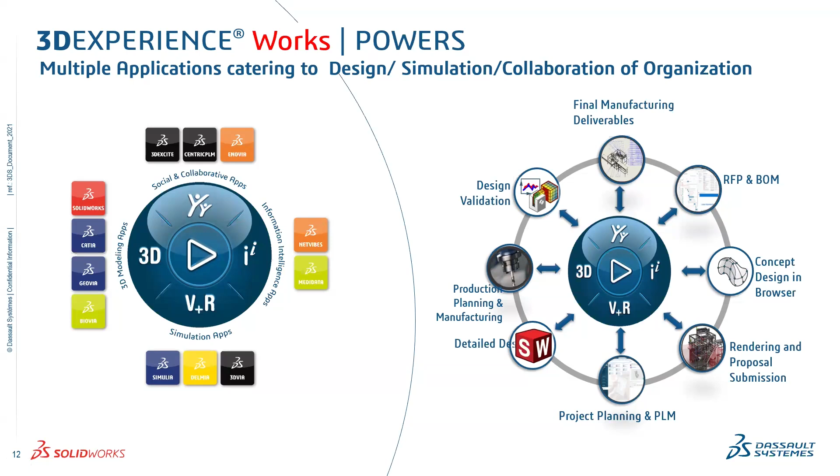We have SolidWorks, and then production planning and manufacturing, and all your design data should be validated. So for that we need design validation, basically simulation, and then final manufacturing. For all these, we have a single platform wherein all these solutions are unified.

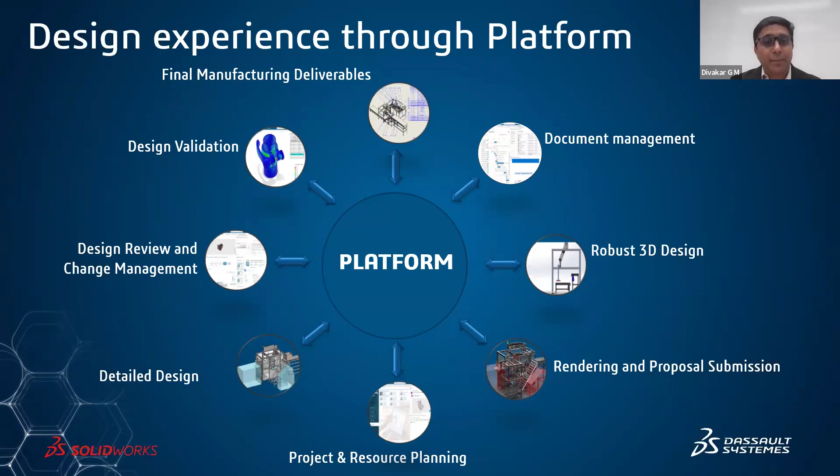And will it not be a great thing if we can provide a platform approach? Imagine a smartphone - we have applications, we have different widgets. Based on the need, we open the widgets and start working towards it. In a similar fashion, since technology has improved, can we have a platform even for this design organization?

Yes, that's what we are going to showcase today, which is nothing but our 3D experience platform. What we are going to take you through in the next 25-30 minutes, what I'm going to showcase in my demonstration is this: when you look at 3D experience SolidWorks, the latest SolidWorks, you can imagine the design and engineering portion is definitely taken care of.

You already know SolidWorks is well known for its 3D robust CAD modeling system. Along with that, the governance or data management portion is kind of inbuilt in nature. Then anything on simulation, that is also there in the same platform. So basically what we are talking about today is these are all connected products in a unified platform, which will definitely result in a collaborative work environment.

How is this possible? Because when we say latest SolidWorks, which is 3D Experience SolidWorks, of course the robust design tool SolidWorks is there. On top of it, when you procure any SolidWorks or upgrade your existing SolidWorks to the latest SolidWorks, you can imagine the data and task management is inbuilt in nature.

You heard it right - you are not going to procure one more software to manage your data. Instead, within SolidWorks itself, you will be able to manage your data, whether it's revision management, version management, or task management. It is already there, inbuilt within the SolidWorks interface. In the next couple of minutes, you will see a demonstration on that as well.

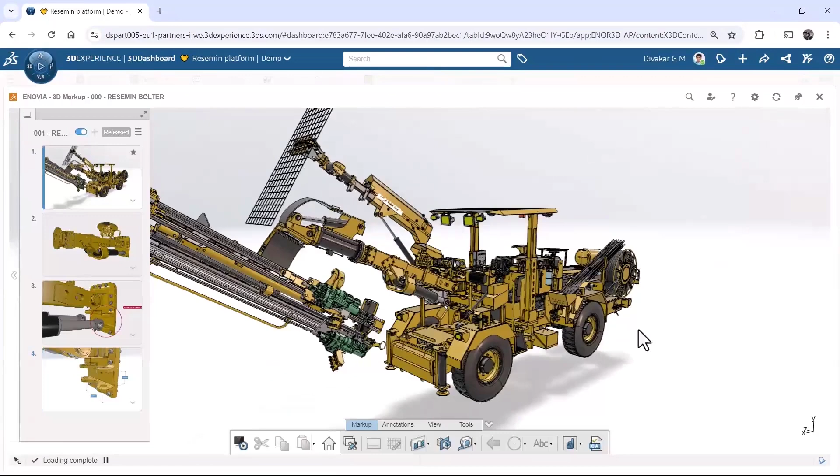Now, the design head opens the task and he sees that instead of going by emails or text, he can literally go by these kinds of markups, which were created by even a sales leader or a marketing team or the service guy as well. So he understands, yes, this is the machine I'm supposed to work on. In this subassembly, there is a requirement that I need to add - in this case, I'm planning to do a design of a knuckle head assembly. So this was pictorially communicated to the design head as well.

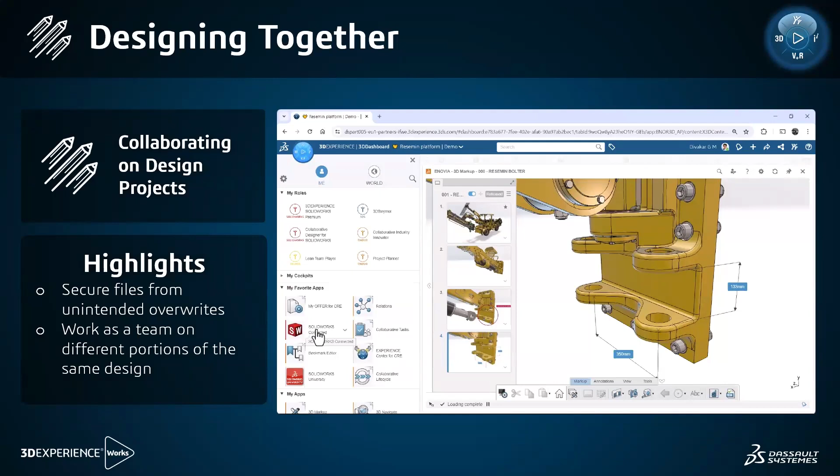Now, coming to the design head, let's see how he can start his journey. First, he will just log in. He will launch SolidWorks from the platform. He will understand this is the assembly - he knows the details - so he will open up the assembly. Yes, this is where the assembly needs to be done.

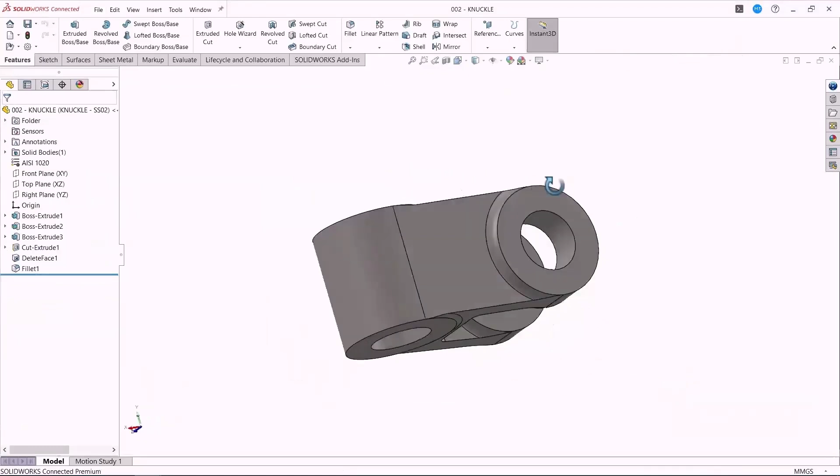He will understand the first thing to work on is creating a part. For example, this is the knuckle part. I'm not getting into how this can be created - he has already created the part.

Now you will see the changes, how SolidWorks will help you. Data management is already coming into picture. As you can see on the right pane, a click of a button and I'm entering the platform area as well, that too within the SolidWorks interface itself. So when I save this component, you see earlier it was empty - now you have all the relevant areas like revision, maturity state, all that information automatically generated.

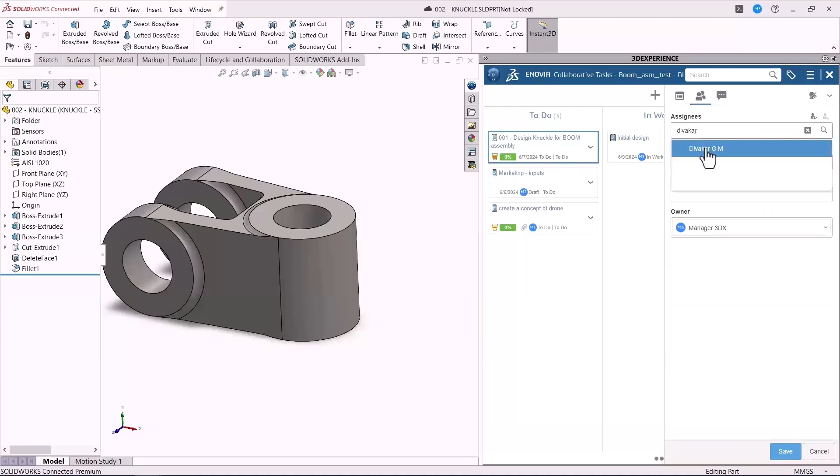Now, as a next step, I have created this component. I wanted to push this to my design engineer, stating that he should build a complete assembly out of this knuckle head, which will be fitted into that particular boom assembly. Now, instead of telling my engineer to go to this folder and pick up these components, in the task itself I've started creating a task. I have added the links to those components as well. Then finally, I'll assign this to my engineer, stating this is the component you're supposed to work on, this is the assembly you're supposed to work on, and so on.

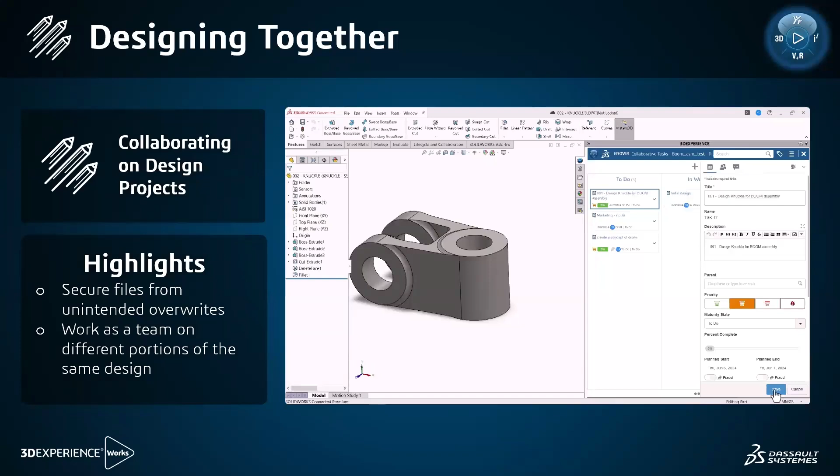So what you have seen is the transition from traditional to the latest way of working, where instead of simple email communication with words, you are seeing everything pictorially, and that too with the right data. So that's how you see the communication or collaboration has started happening.

Now let's come back to robust design - how this can be done. Many of you may have already seen one way or another how SolidWorks works. Let me show the latest SolidWorks, how it will help you be much more productive, along with the built-in data management which I talked about.

Now, as you can understand, this is the SolidWorks interface - no change at all, right? So now with a click of a button, the platform comes into picture. The designer has opened his task. He understands these are the tasks his manager has assigned. He has picked up the priority task. The manager has told him to use this data, and so on.

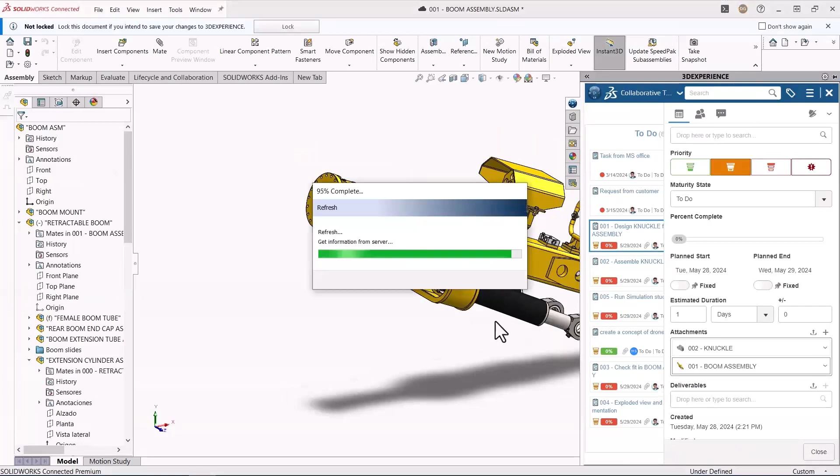Whatever the manager has assigned, he sees that and simply drags and drops it. Literally, he just has to drag and drop, with no need of searching the data. From the task, he has dragged and dropped the assembly, and the assembly opens up in the SolidWorks interface itself.

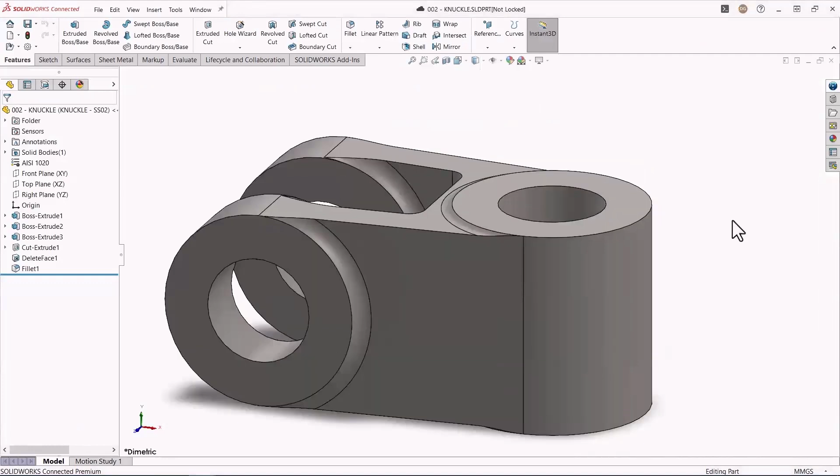He understands, yes, this is where I'm supposed to build the knuckle assembly. The design head has also attached the knuckle component, so he'll open that as well and start the journey using SolidWorks. Since he has already started working towards it, he'll move the task to 'in-work' so his manager is also informed that the engineer has started working on it.

Now, a couple of basics of SolidWorks. You can start directly from a part, creating the assembly and so on. I'll try to showcase the differences and what benefit you can get.

Now the designer understands there is a bearing he's supposed to assemble. Instead of creating a bearing, he remembers that in his previous project there was a link kit where he used a bearing that fits exactly into this assembly as well. So even without knowing the part number, he will simply search for that assembly. He will see the parent-child relationship, understand this is the bearing he's supposed to assemble, and simply drag and drop it, assembling it seamlessly.

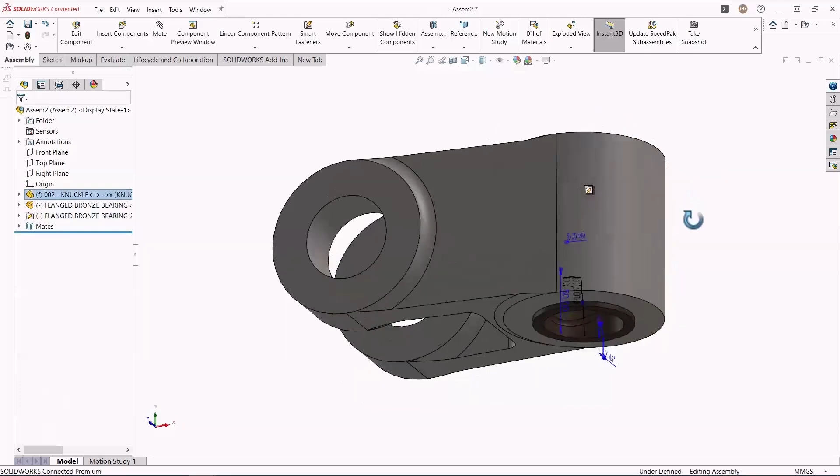Now, SolidWorks also helps you with smart components. That means any component you have assembled, any cutouts that need to be created for managing these things, can all be taken care of. Now the cutout has already been created into the knuckle component as well.

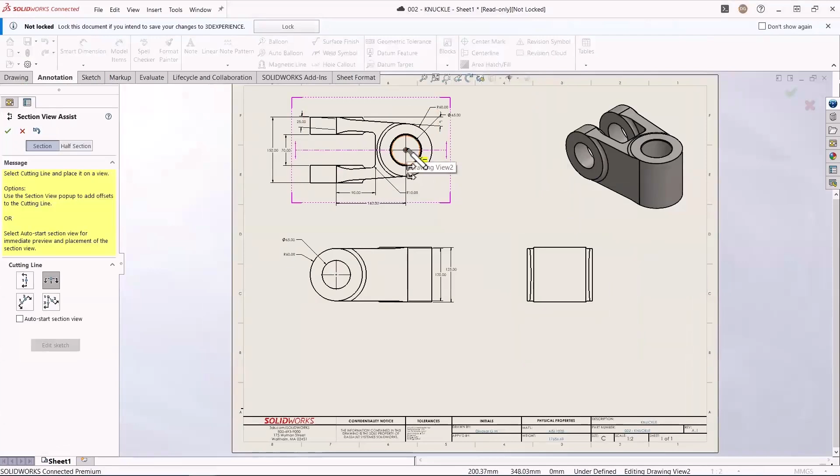Now the next thought is, since we have created the drawing, we need to pull that cutout information into the drawing. So we will update it with the sectional view. We pull it directly and see that the cutout information from the bearing has already been transferred to the component. We are talking about parametric drawing, so all the information is there.

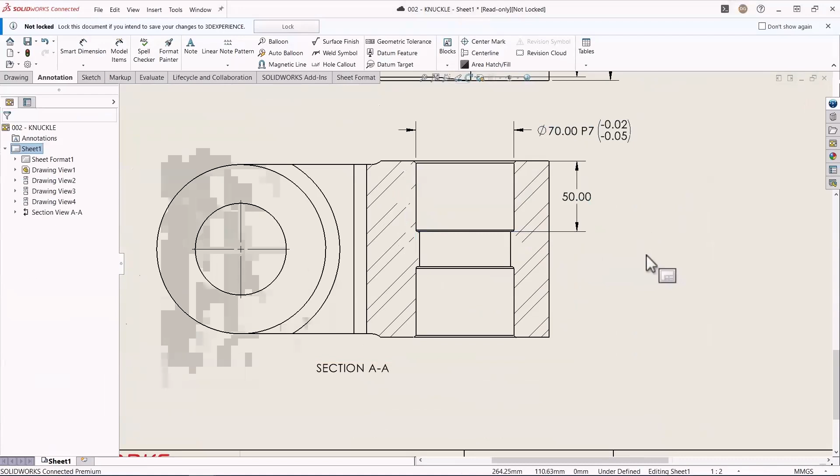Then, instead of creating the dimensions again, we take the help of the dimensions already utilized during the CAD model. From the CAD model, you are pulling the dimension data, and seamlessly you can auto-align the dimensions as well. In this way, you will be able to complete the drawing.

Now let's move to the next part of the journey, where I would like to assign a few more components. Let's talk about the design library. In SolidWorks, you have the design library, where you can build your own custom library as well.

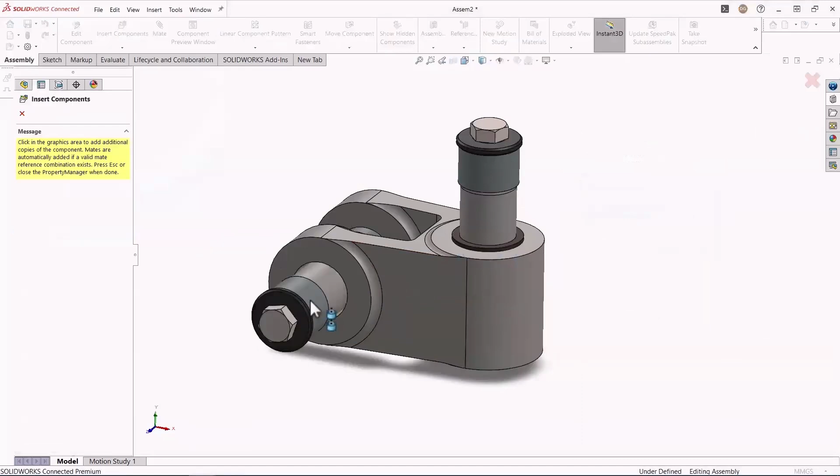For example, this expander pin, I've brought it, just dragged and dropped into the assembly, and I was able to assemble it. Not only that, with the latest SolidWorks there are many more assembly features that will help you assemble, like the width mate example I'm showcasing here. Just pick randomly 4 faces, and it will automatically align itself to the middle as well.

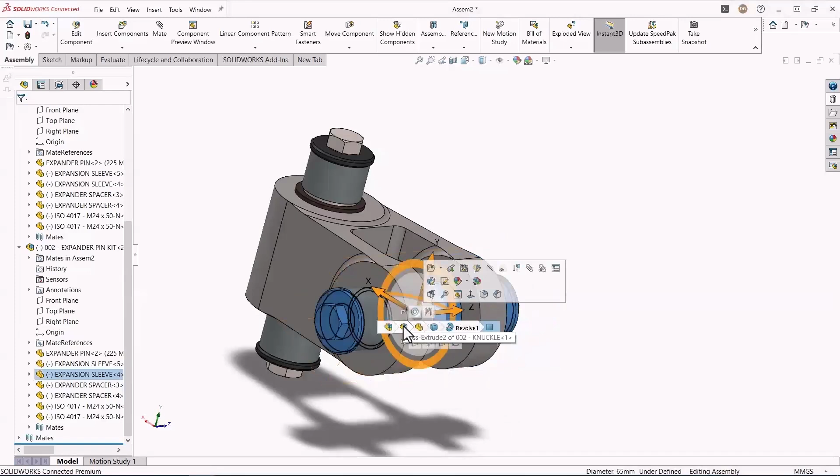Then another great feature is configurations. If you are using them, you can go to the configurations - instead of 225 length, I want 150 - and I was able to do that seamlessly as well.

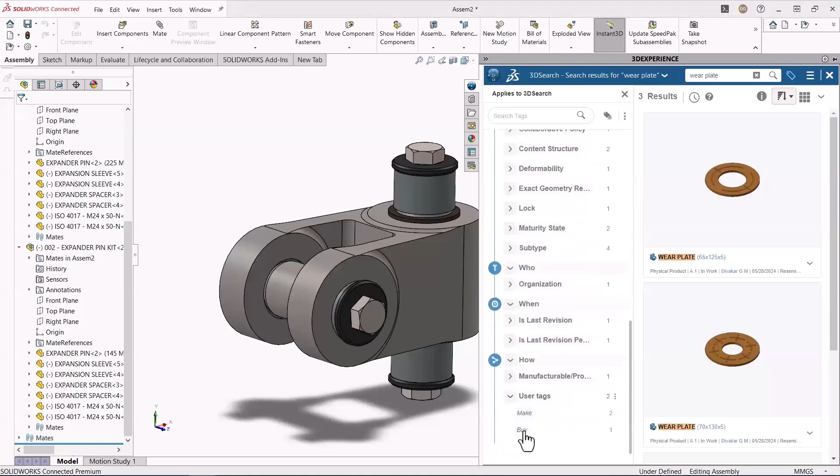Now, another great thing you can see here: I remember I'm supposed to use a wear plate in this assembly. When I search for it, I don't know the part number, but I'll search by name. I can also filter, just like Amazon or any other platform - you can search by filters too. So now I'm filtering the wear plate, where the initial results were 3. I wanted to narrow it down to the wear plate which is a bought-out component, so I pick that property and I'm able to do that. Then I simply drag and drop and assemble it again.

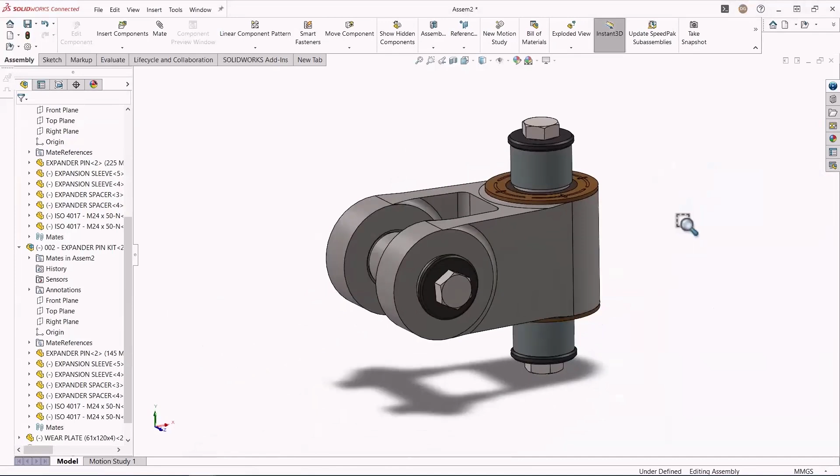So what you saw in the previous section was seamlessly utilizing all the benefits of SolidWorks. Along with that, we were able to utilize the components, search seamlessly, and do many more things.

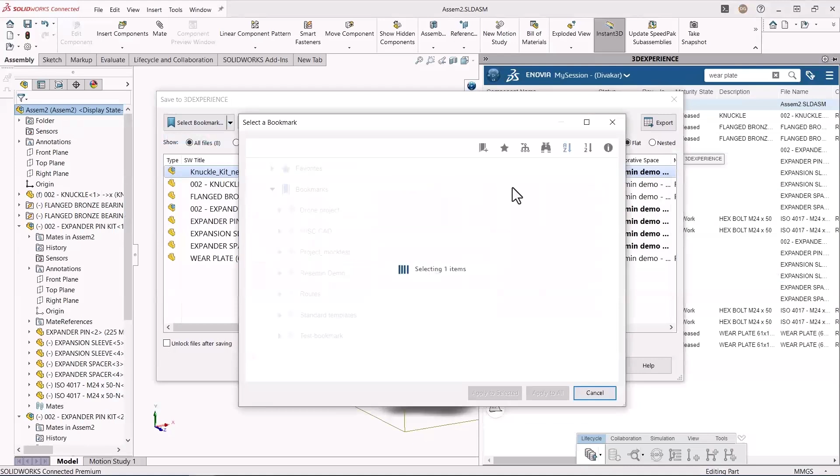Now let's understand this is the new assembly, so I need to check this in as well. As soon as I save it to the platform, I can give it a number - let's say in this case, I'll give the naming as 'Knuckle Kit', the new assembly. Now I'm going to save it to one particular bookmark. As soon as I save it, this is visible for my manager as well - he doesn't have to follow up.

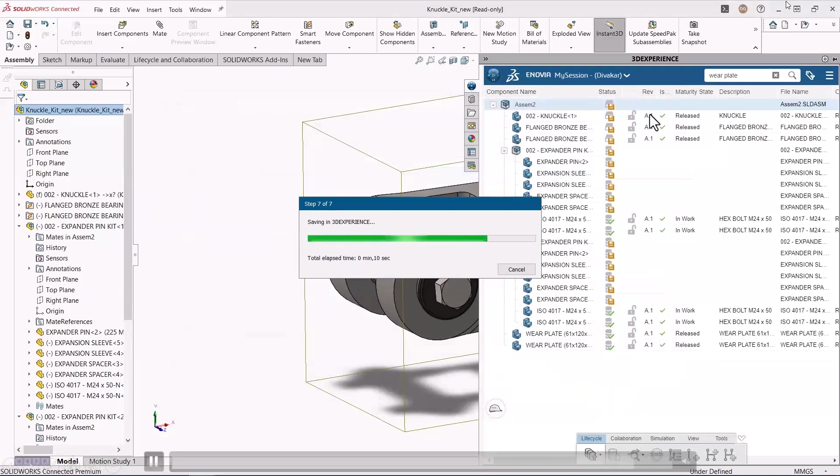He will also come to know that this component has already been done, so the data is already shared with my manager as well. Let me save this. Now, as soon as I save it, you'll see the revision and maturity information coming up automatically.

This is my last section on the CAD model where I'll try to showcase what else you can expect when it comes to SolidWorks benefit. Very quickly, I'll try to showcase this.

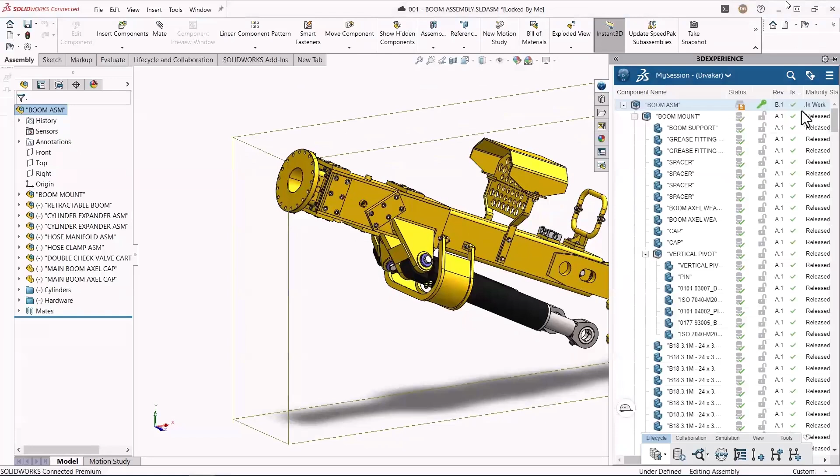Coming to data management, this top assembly is already released. Since it's released, industry best practices require us to bump up the revision, so from A1 I'm going to increase this to B1. Within the SolidWorks interface, I'll right click and say I want to revise this. The B1 revision is taken, and automatically the maturity state changes from released to in-work, and the lock key suggests you have all the rights to work on this assembly.

It's a visual treat when it comes to the latest SolidWorks. You can know just by the symbols what is the state of this component, what is the state of the assembly, and so on.

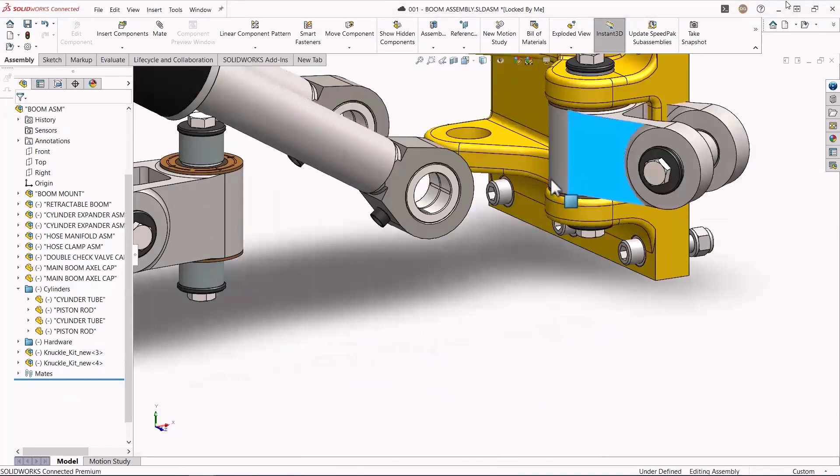Now I'm trying to assemble all these things just like your loved SolidWorks, no change, simply using all these magnetic assembly features as well. SolidWorks also gives you the options at your fingertips when it comes to assembly, as soon as you pick surfaces and so on.

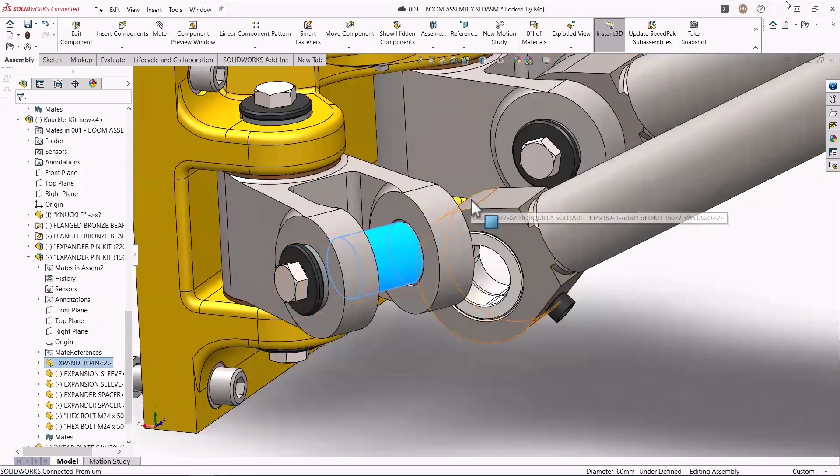After this assembly, let's say we have completed everything and it looks good. Now, moving forward, one more feature I would like to showcase: interference or collision detection. You have that option where SolidWorks helps you create an interference check or collision detection.

It also highlights where the detection is happening. As you can see, two components change color, meaning there is a collision happening.

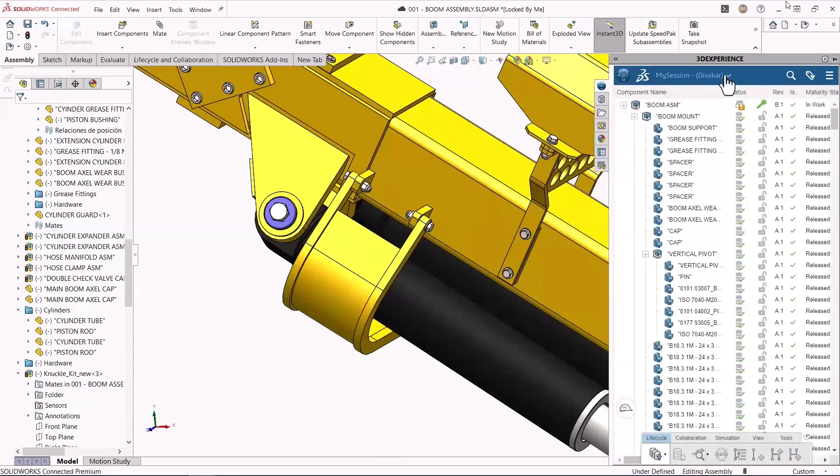So how do we rectify this? The best way, in this case, is that this cylinder guard needs its width increased to avoid the collision. But the practical problem is, what will happen if it's already used in another assembly?

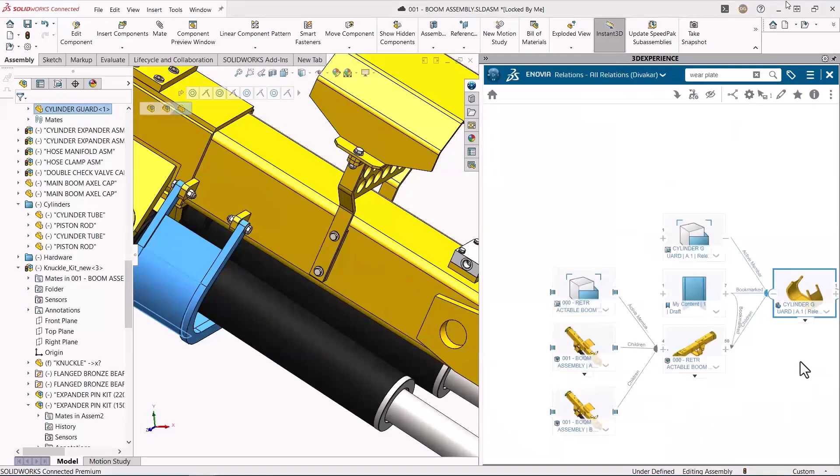For that, you have this relation application within the SolidWorks interface itself. You can simply drag and drop it into the relation application, and you'll see where this component has been used. As you can see graphically, it's been used in three different assemblies. Any change here is going to affect those assemblies as well.

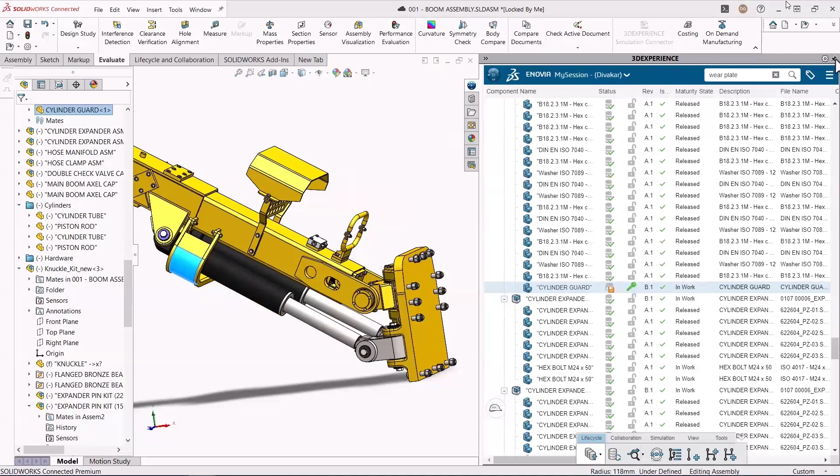Let's say in this case we are fine with that. Since the cylinder guard is released, I'm going to revise it once again because changes need to be done, so we'll change it to the next revision, B1. You see the lock suggests you can work on top of it since it's in-work, so you can edit it. The next step is pretty easy.

Just change the dimensions and see if this modification is good enough to avoid the collision. So what I wanted to showcase is that instead of going into various areas, within SolidWorks itself you're seamlessly able to utilize your own design library, simply by drag and drop.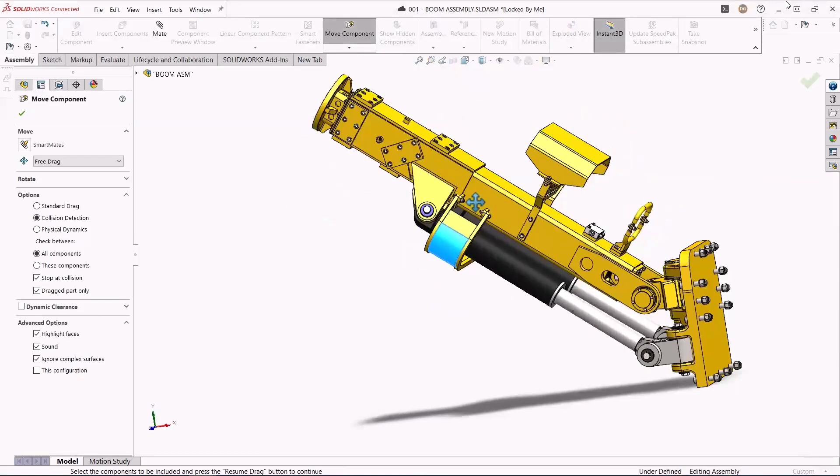You are able to search for a component you've used in previous projects, and seamlessly check whether this component has been used, where-used options, and so on. Everything is there along with revision management—you're able to do revision and version management as well.

Let's move on to the next section. Now, I mentioned there will be a dedicated tenant for you as a customer. Only you and your team members who have access can access it—not even Dassault, not even your reseller. Now, the thing is, how secure is my data?

Everybody wants to secure their data, and we do care for that. As you can see, we have all the relevant certifications, all the cloud security certifications, whether it's ISO 27001 or any other certification. We have all the relevant certifications for cloud security and so on. We do have all the white papers which can be shared with you as well.

Now, another aspect I would like to showcase is data security. Today, if you are not utilizing cloud security, probably you can control the security in only two sections, for example the internet layer and the physical security layer. That's about it. But with the help of the 3D Experience platform, you are looking at a 5-layer security mechanism.

Internet layer is there, cloud layer of security is there, as well as applications. You saw that along with SolidWorks, I have seamlessly started using different widgets and applications as well, so you can manage who can utilize what kind of applications. So you have application level security as well. Along with that, virtual system layer, then physical security layer is also a possibility.

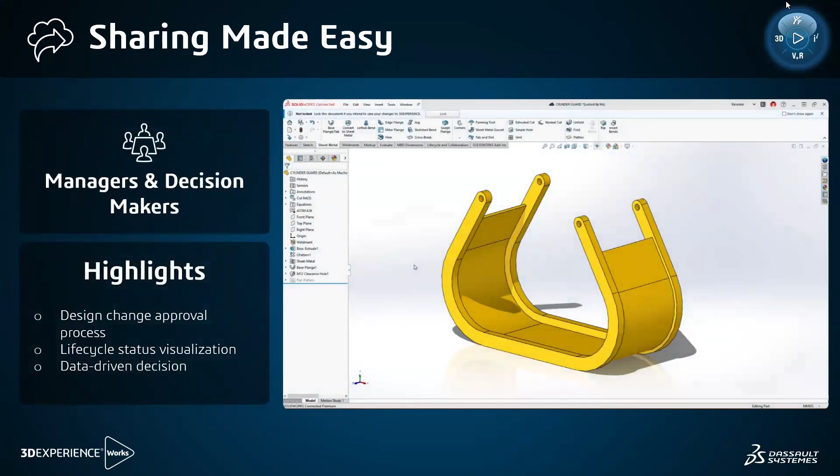Coming to this section, I would like to showcase how managers and decision makers can take part in accessing this data and also change the approval process or the life cycle. For example, in this case, the designer wants to work on top of it, so he will first lock it so that he can work, and the modification I've already created with these perforated holes and all.

As you can see, I would like to save it. Since the lock key is there, the green mark, that suggests I can only work on top of it. Once I'm done, I feel this is ready for quality check, so the next best option is we move this status to the frozen stage. That gives the indication that my manager can look at it and do the quality check, or QC.

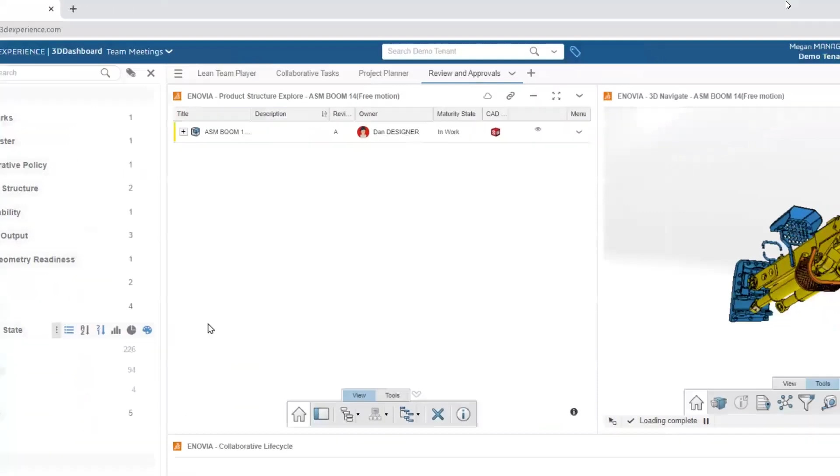Now instead of getting inside SolidWorks, let's say the manager doesn't have SolidWorks, but he would still like to review and release this data. He can do that seamlessly over a web browser, and he will simply look for the assembly.

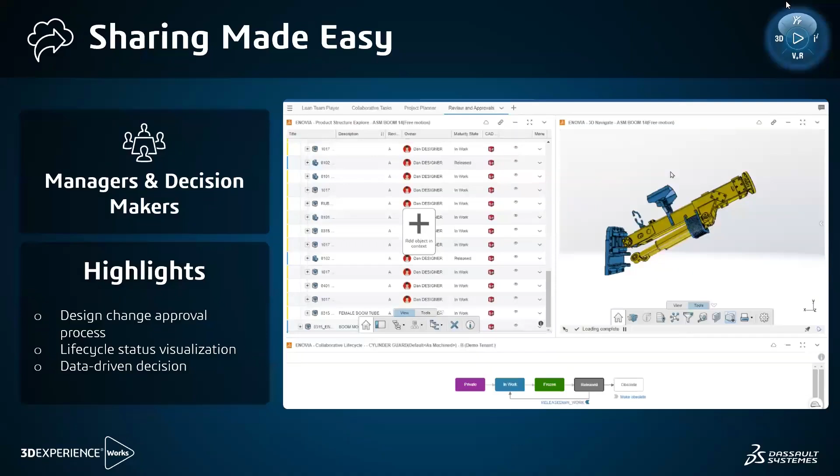He can visually see, as you are seeing here, what the components are, everything is visual. Then the same application you will open inside a web browser as well, and seamlessly you can change the maturity to the release condition. So that's one portion of it.

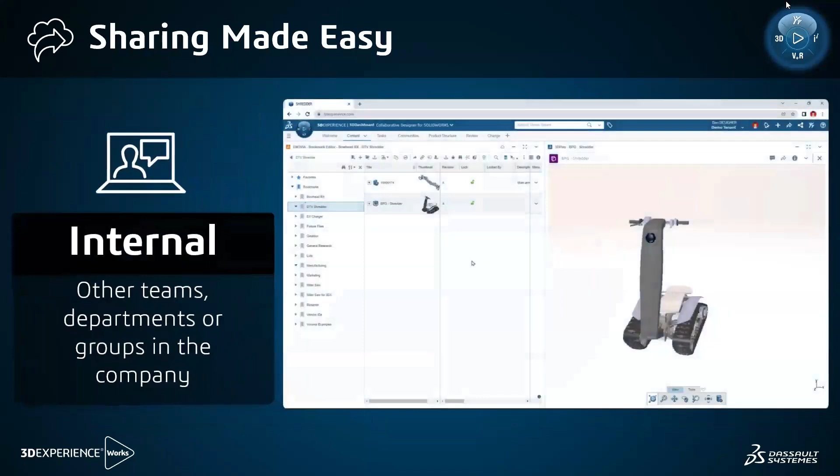But how about other collaborators, internal or external? It can be both. Let's target the internal team first, let's say the marketing team, for example. You have already built the component. How can we utilize this for the marketing team?

For that, the easiest way is you can easily drag and drop this to a particular folder where marketing has access. These are the folder structures. This particular top assembly, I would like to give access to my marketing team, so I can give all the relevant information and access granted to the marketing team.

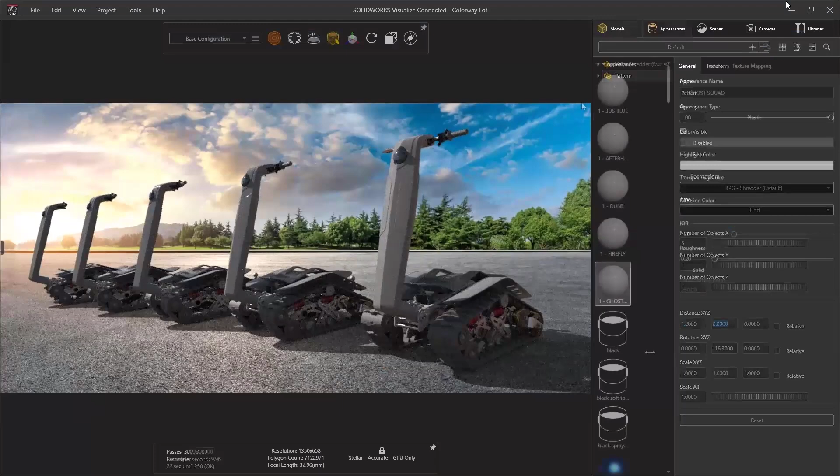Now as the marketing team enters the same platform, he will see that in this particular folder, yes, this is the component I'm supposed to do some rendering on. So he will take that, seamlessly open SolidWorks Visualize, and start working towards rendering the component as well. I'm not getting into how it's done in detail.

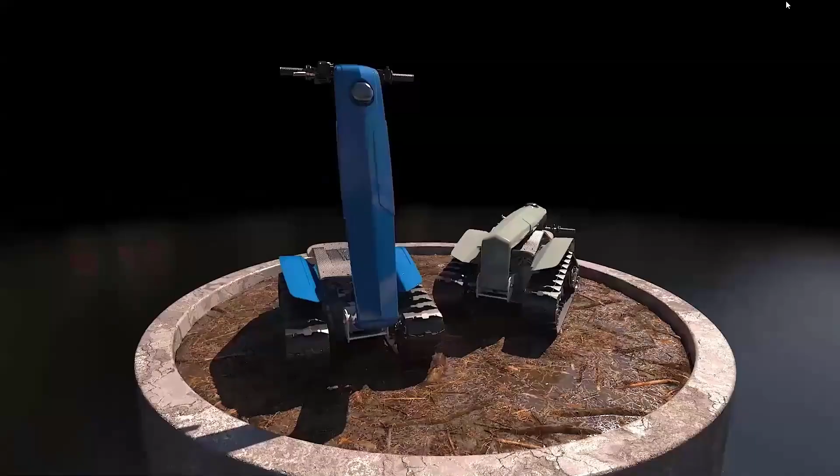The gist is you can easily collaborate with your cross-functional teams as well, marketing team, sales team, and so on. They will be able to utilize the same 3D CAD model, which is the single source of truth, to build photo-rendered images and create stunning wow factors whenever you take it to your customers. Now let's look at how external suppliers and vendors can be communicated with, or how you can share it with them. The good news is, let's say your suppliers or vendors...

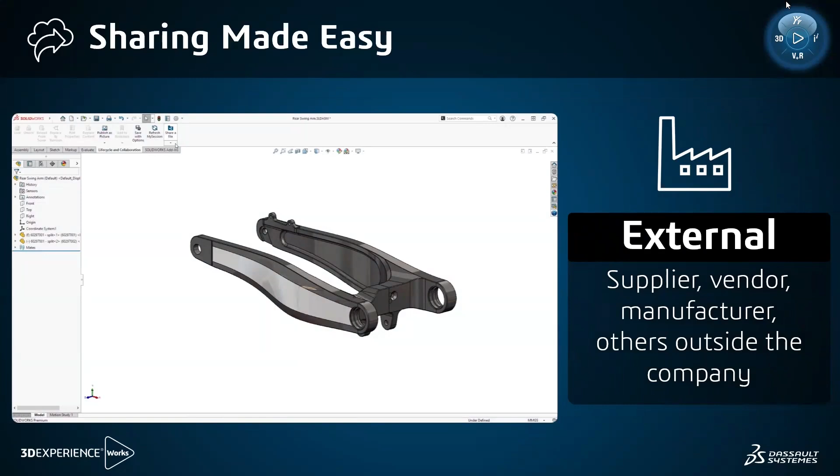Today, they are not using SolidWorks, but still they will be able to access this data and work towards it. Let me show how. In SolidWorks, you have an option called share a file where you can activate sharing with external members. Let's say I would like to share it with a particular supplier and another person from the vendor. I can share that data to that particular vendor or external people as well. As soon as you click on share, he will get a notification through an email, and only with that email, he will be able to access this data.

So everything is secured. He will open this particular component in a web browser. He still doesn't have SolidWorks open, but he will be able to open it over a web browser, see the details, and start communicating.

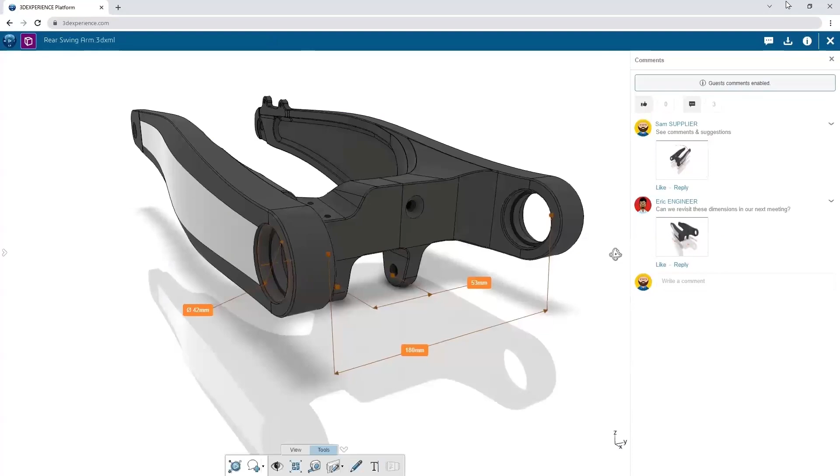So collaboration is happening over a web browser now. He has all the options to explore the assembly components and so on. Markup is done, assembly explosion, measuring - all those benefits are also there over a web browser. Just like any other software, like Facebook or some networking software, he will be able to perform the markup and share, comment, like, and all those things are possible.

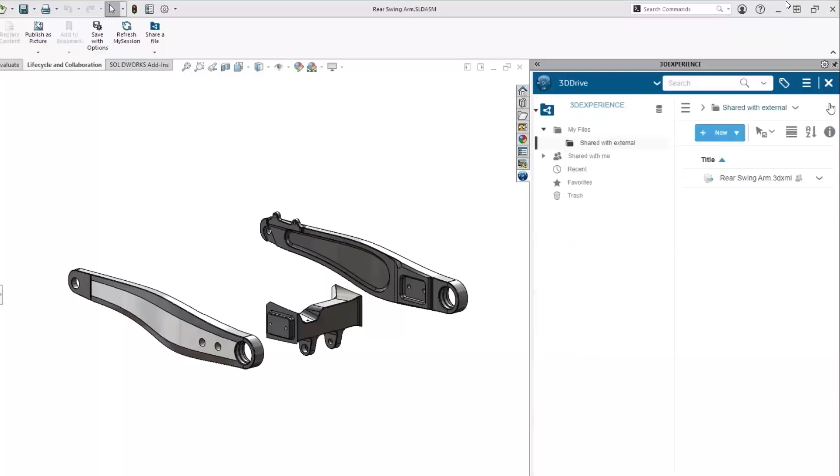As soon as he shares back the data, you will be able to pick that up and do the relevant modification and start communicating using this web browser itself. So this is the next level of communication with your vendor and supplier, even before starting detail designing. These kinds of communications are a possibility.

Now, we saw how design can be done and how collaboration can work together. Let's talk about scalability. What does scalability mean to you? As we discussed, changing headcounts - as you can see, these are already on the platform and these are all out of the box solutions. So you don't have to literally worry about how, if I add a few more people, these things can be adopted. It's no problem at all. You can easily adopt, your team can easily adopt to that as well.

Now let's focus on other two areas: working with other departments, and how new technology can be scalable. This may be with the manager, simulation team, or marketing team. Let me showcase how management can access this design data, without having SolidWorks installed in their system. You heard it right - without SolidWorks, over a web browser, your management can access and control the design data and all the relevant documents as well.

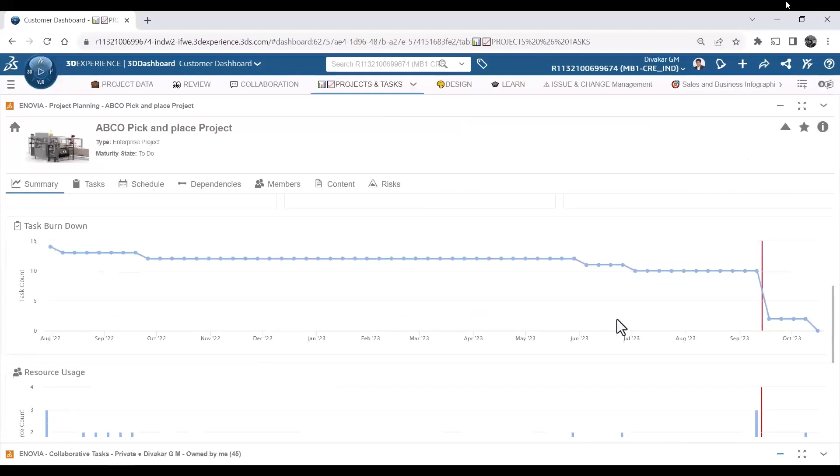Taking it to the next level, how projects can be managed - of course, the live dashboard is there. What you are seeing is not a static image, it's a live dashboard. As your engineers move the data to complete or so on, the data is available here. Not only that, the same task which you have created can be seen in a Gantt chart way as well.

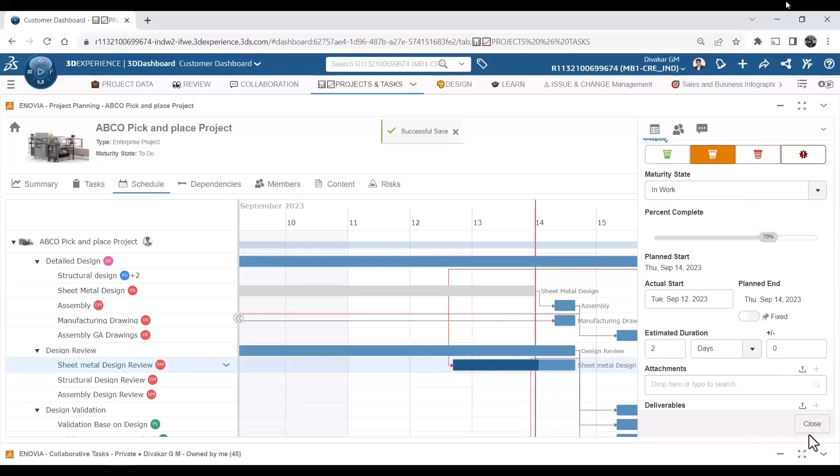As you can see, multiple tasks are there. You can see and visualize through a Gantt chart, and there is also task dependency you can create. Now, as your engineers change the percentage completion, you can visually see that in this particular widget also.

That will give you the complete picture of what is the project, how is the project going, and so on. No need to connect with your engineer individually to understand what is happening. Everything is visual, you will be able to understand the project is happening this way, the tasks are completed so much, what is the next level of action.

You can take informed decisions with the help of these tools as well. Now, let's take it to the next level where you are a design head or R&D head. You don't have SolidWorks, but still you wanted to review. I already showed how you can review.

Let's see how the maturity or revision can be handled from the web page itself. Without SolidWorks, again, you have entered into the platform area where you will see the same widgets, where the management and your engineers have saved the data. As soon as they save the data in these particular folders, the data is visible to you, whether it's SolidWorks data, DXF data, or simulation data.

Along with that, as you saw earlier, once I save the data to the platform, revision and maturity is automatic, and that data is also visible to you. You also see some more information, whether you are looking at the latest revision or an older revision, and so on. Not only that, the red lock suggests that one of your engineers is still working on this particular document.

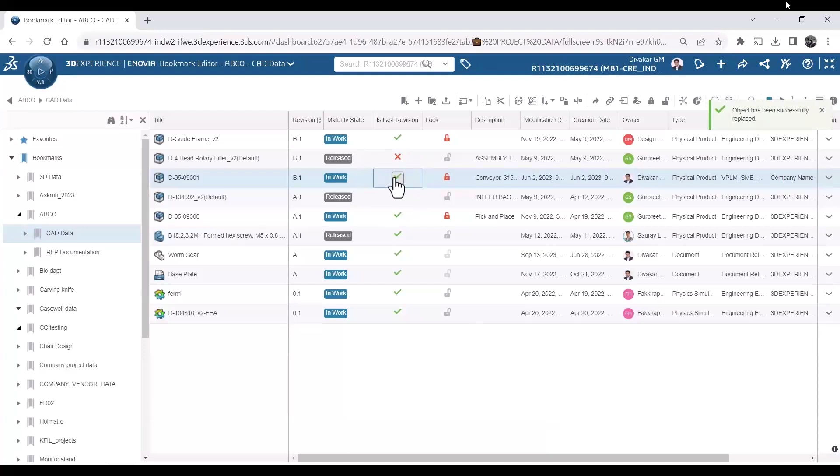Now we understand this cross mark means I'm looking at older data. All the revisions are also there, you can bring it to the latest one. Just by clicking on top of the cross mark, you can pick and choose whichever revision you want to have a look at. In this case, I want the latest revision, and visually you see that you are looking at the latest data as well.

We said that as an organization, it's not only CAD data, even documents we need to manage - ISO documentation, all these things is all about managing your data. Whether it's a PDF file, document, or presentation, you can manage the same. Just like CAD, you can also manage non-CAD data, and the revision, maturity, everything can be managed here.

Now let me show an example of how you can release or change the maturity of this particular component. The same widget you opened in SolidWorks, you can access over a web browser as well. This particular component is in work condition, and I would like to move it to the frozen stage. Just a click of a button, and it will move to the frozen stage.

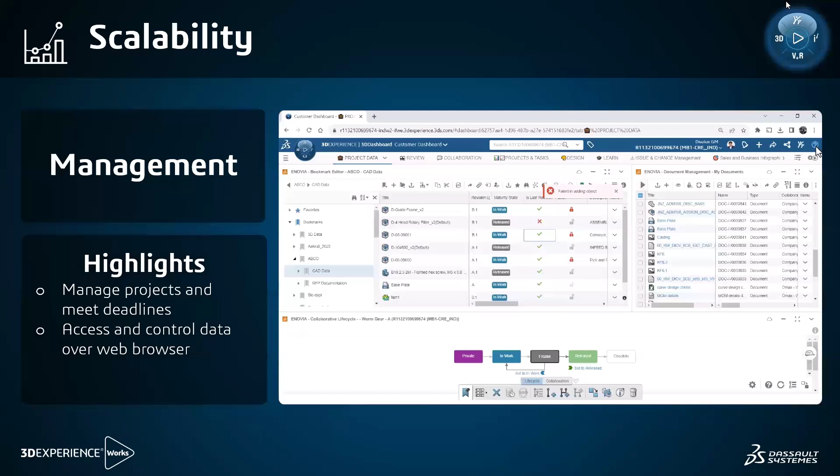If you want to release, you can release it, or if you want to come back to in-work, you always have a choice to make that decision - what is the next step required for that particular document, and so on. So that's one way it's scalable to the management. The same platform benefit, you can take it to the management also. Let's understand how it can be taken to the marketing team as well.

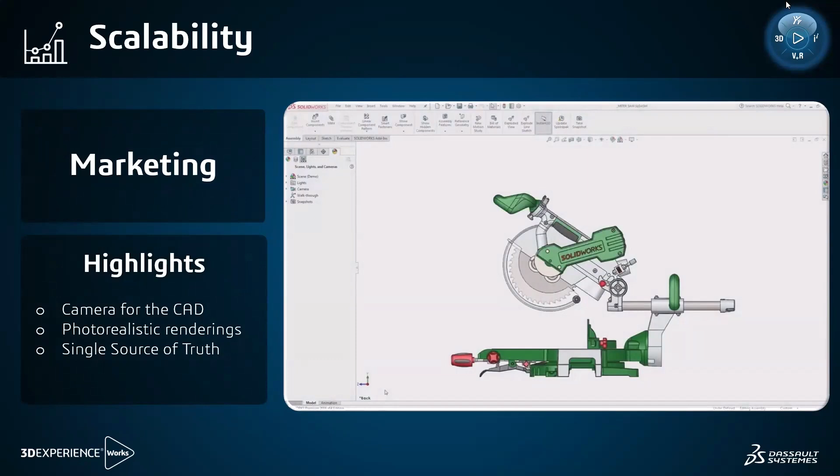As we saw earlier, you drag and drop into a particular folder - for example, this particular cutter, I would like to visualize using Visualize. I would like to create photo rendered images. This Visualize comes as a part of SolidWorks Professional and Premium, you're not purchasing it separately. It is already there with you.

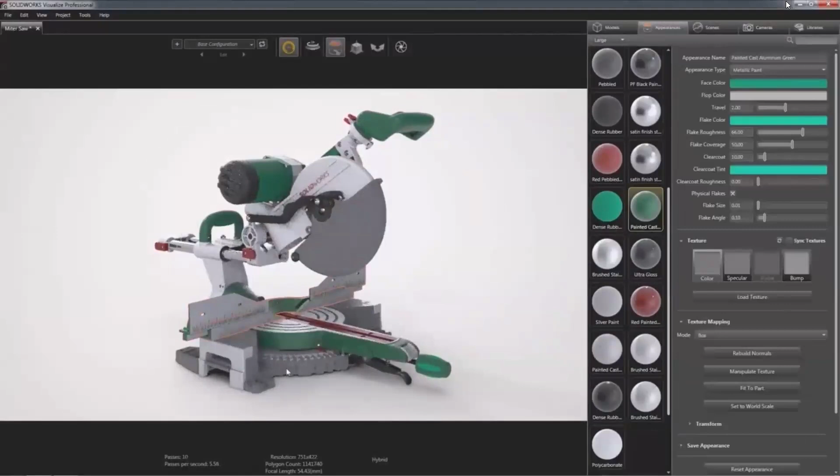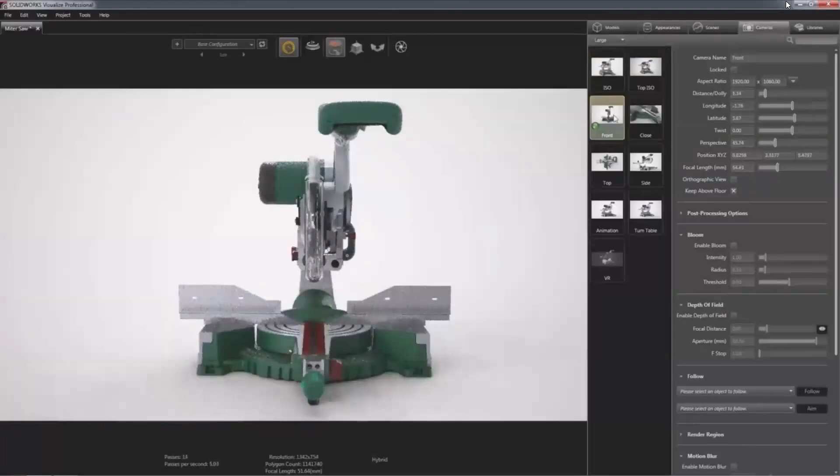Now the best part is all the relevant appearances - there is a huge library, whether it's metal, plastic, transparent, all this information is already built in. Not only that, even the appearances, whether it's the texture, you have complete control. So the point I'm trying to make is you can always create photorealistic rendering using your CAD data itself.

Whatever you're seeing, even before you start your first prototype, you will be able to create photo rendered images without having that. These are a couple of examples of how you can create photo rendered images, and videos are also a possibility - you can scale to that as well. Now another interesting portion, my last area on scalability, is how this can be adopted to new technology. As you grow, you need more and more access, more and more control on your design, and so on.

The requirement will keep on changing. For example, nowadays we are all talking about design over a cloud platform, or design over cloud, right? Are we ready for it? I'm going to showcase that.

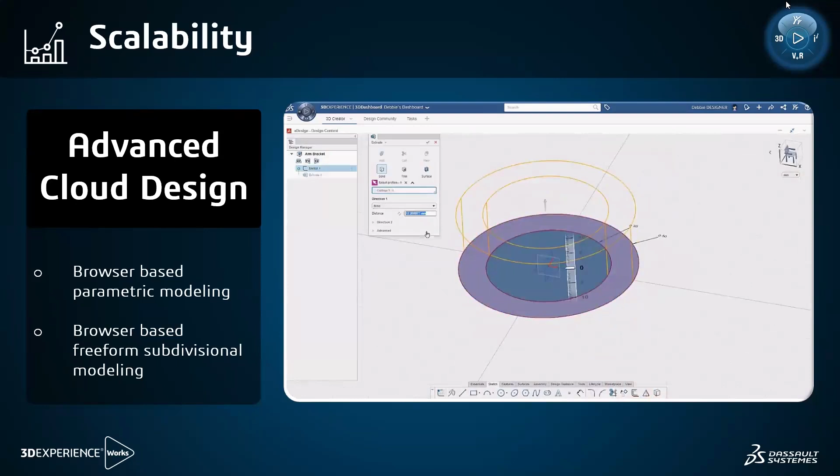Of course, we are ready for it. Advanced Cloud Design tools, which I'm talking about today, is a browser-based parametric tool. You heard it right, your engineers are going to work over a web browser. If they are out in a field and they wanted to work on a concept, they don't have to scribble on a piece of paper. Instead, they can make use of any handheld device, maybe a tab or something, and with internet connection, they can start working towards parametric design itself.

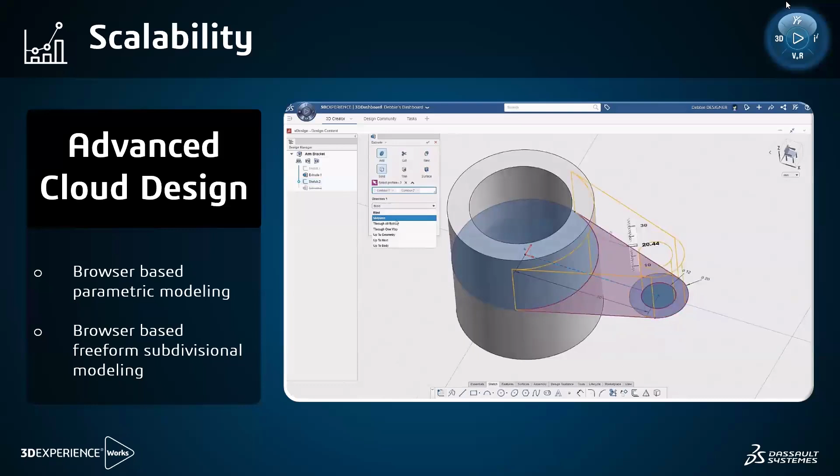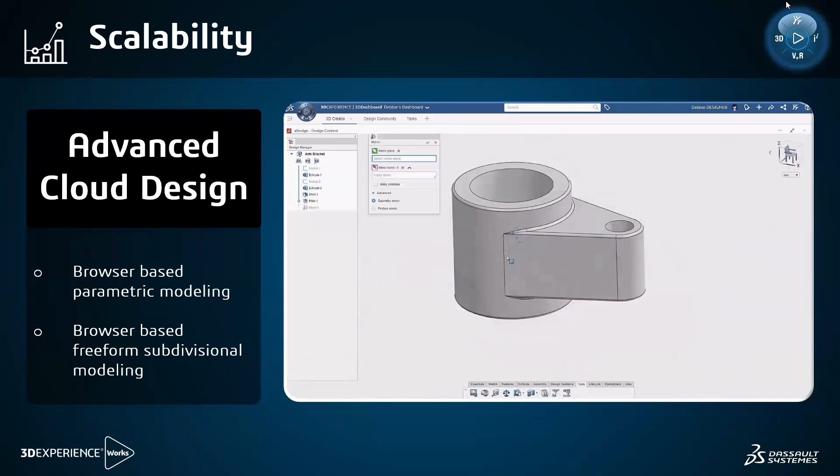As you can see over the screen, there is a web page. You log in and you have access to this. Literally no installation is required. Over a web browser, you can log in and start working on the parametric design you are looking at. All the dimensions are there, features are there, and you can always work on your concept design seamlessly over a web browser as well. So this gives you enormous capability to be more productive whenever you are on field as well, right?

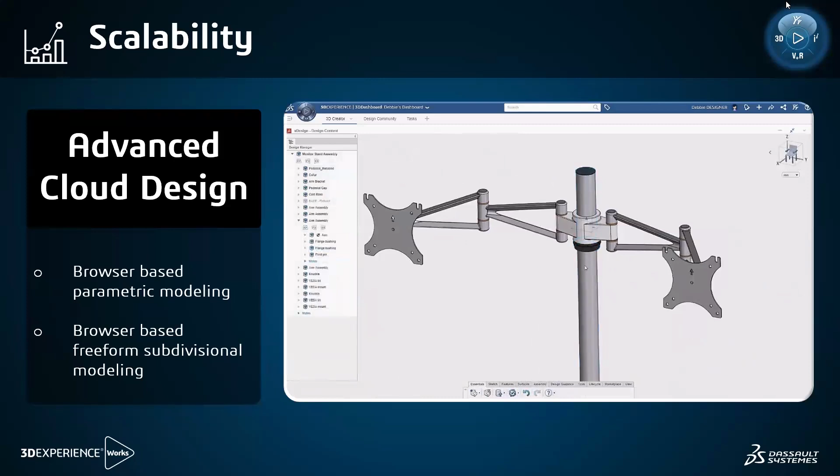So you will be able to build these kind of assemblies. You can check on the linkages and so on. So we are looking at the futuristic modeling capability. When you procure SolidWorks, that always comes with it. So you are pretty much ready for the future as well.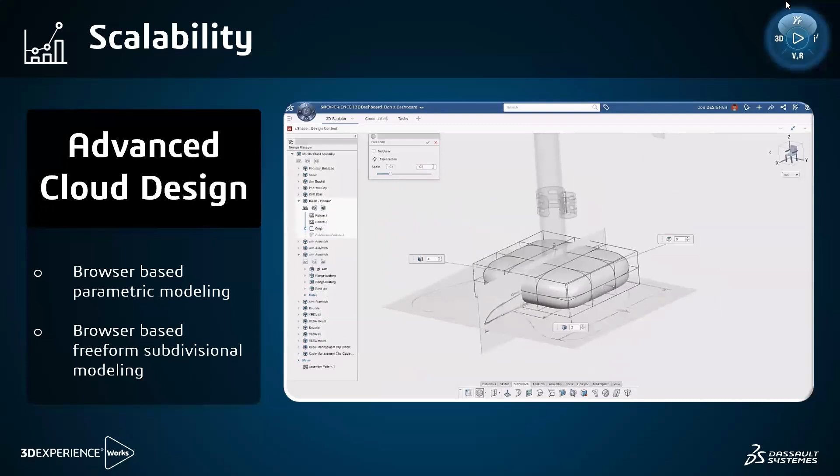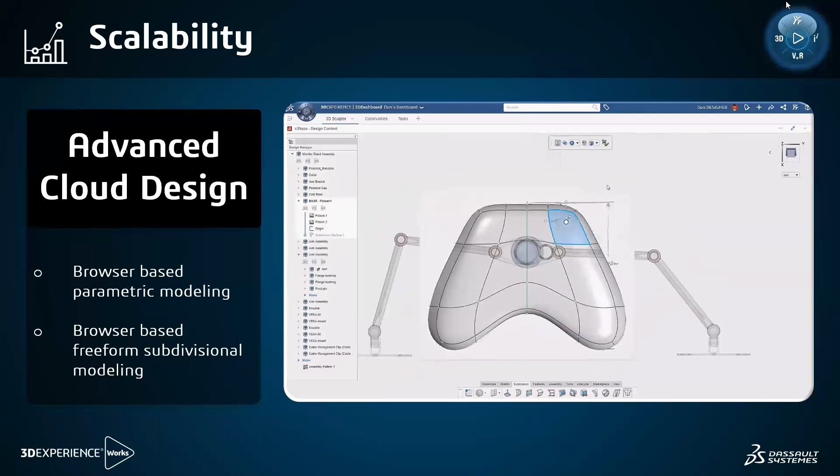Taking it to the next level, if you are into ergonomic modeling or some kind of clay modeling, surface modeling, you can think of this particular widget as well, where, as you can see, it's more like a push and pull mechanism that is something you have to learn. That's it, right? So you will be able to create these kinds of surface modeling, clay modeling kind of operations seamlessly. You will be able to work on top of it, and that too over a web browser.

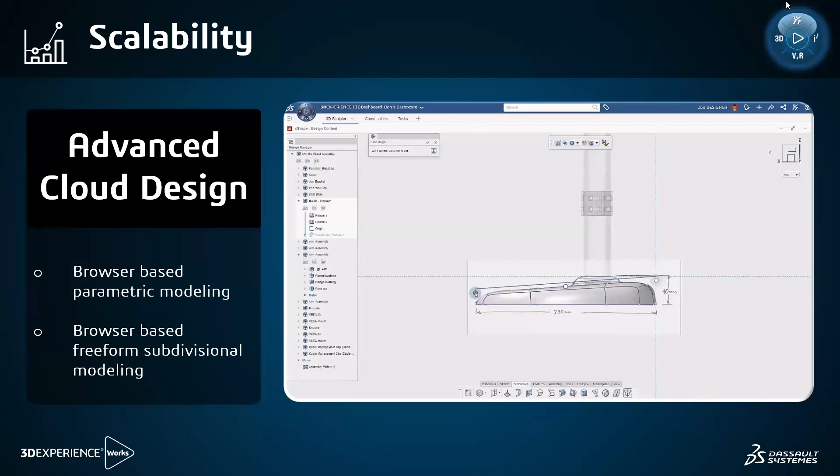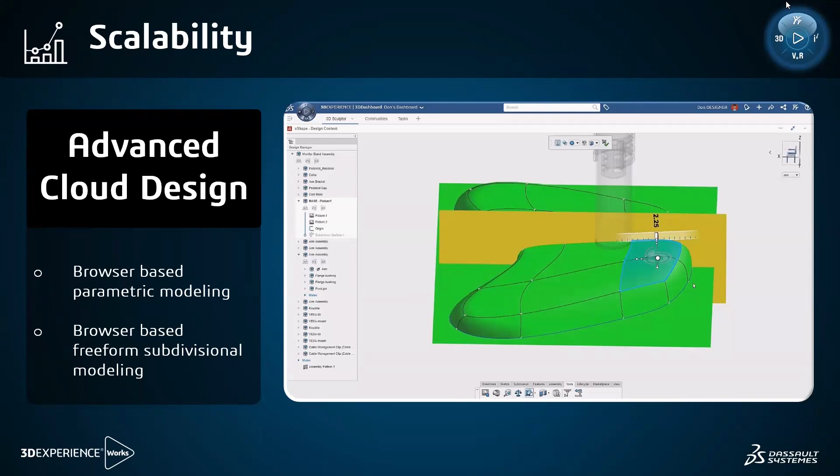And the great part of this is it can be checked for manufacturability also. Then the same component which you have created, the interoperability is there. That means you don't have to convert this. You can simply directly open that inside SolidWorks, and vice versa. Whatever design you have done in SolidWorks, you can seamlessly bring into these cloud-based tools also. No conversion at all. The same CAD model you can bring into SolidWorks, and a SolidWorks model you can open in a web browser as well and start working towards your assemblies and so on.

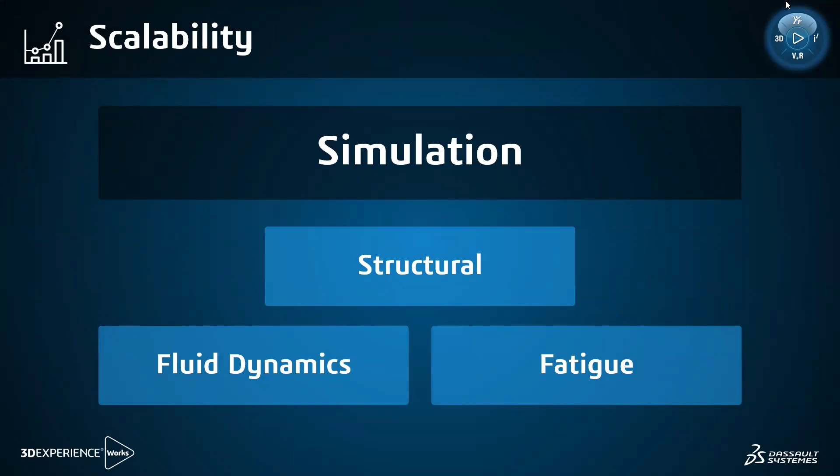Now, to the scalability portion, when it comes to simulation, today's need is you need to be first time right to the market, as well as faster to the market. One of the best ways of doing this is you need to simulate your product before it goes to the market, right? So we have all the right capabilities, starting from stress strain analysis till crash testing. As you are seeing, the structural analysis, whether it's a drop test or simple stress strain analysis, we have all the relevant applications in the same platform as well.

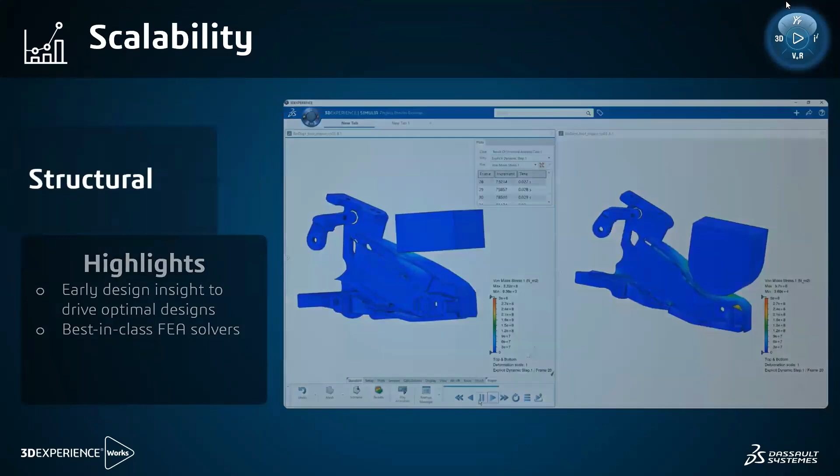That means no exchange of data. You don't have to worry about data losses, since you are dealing directly with the SolidWorks component itself. Literally no change, no data losses as well. Coming to fluid dynamics, we have all the relevant capabilities. The images, I have put up a couple of examples so that you can think of the relevant areas. Any kind of fluid dynamics, we have all the fluid dynamics analysis also.

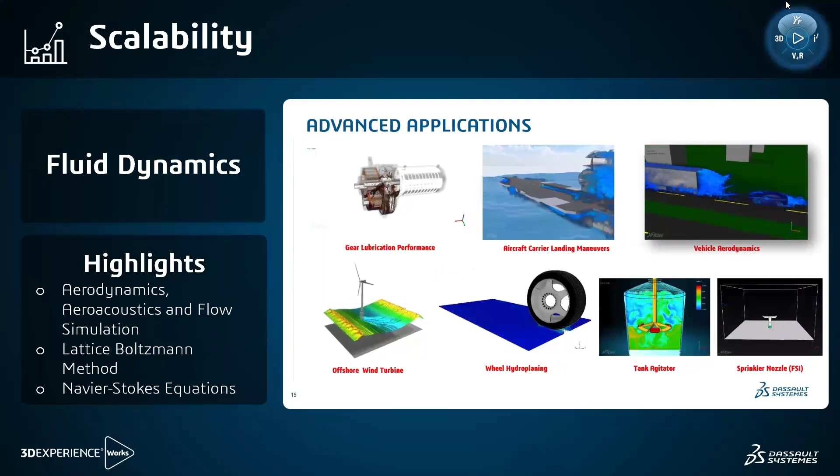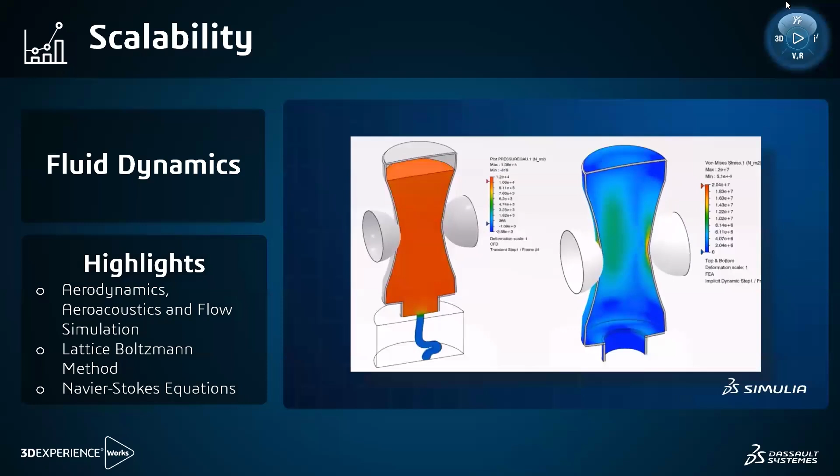And the great part is, if you are into analysis, you might know by now that Abaqus is the solver we are using. So we are talking about the greatest solver, which is well known in the industry, which is the Abaqus solver. You are utilizing the top-notch product, even for your SolidWorks simulation as well, right?

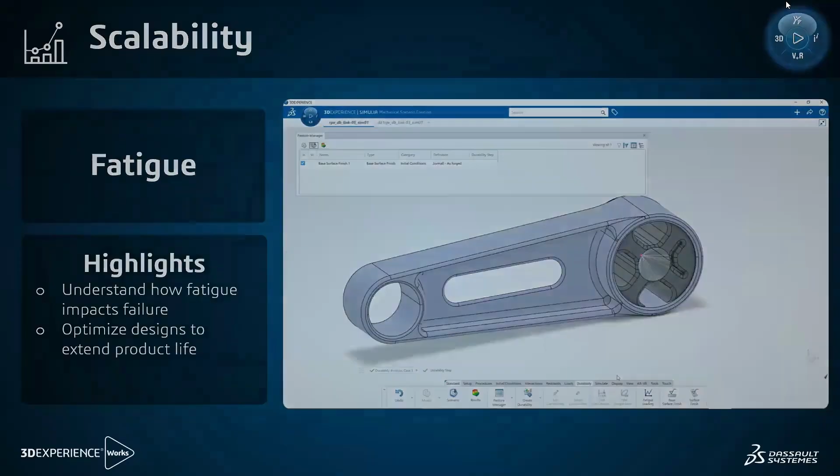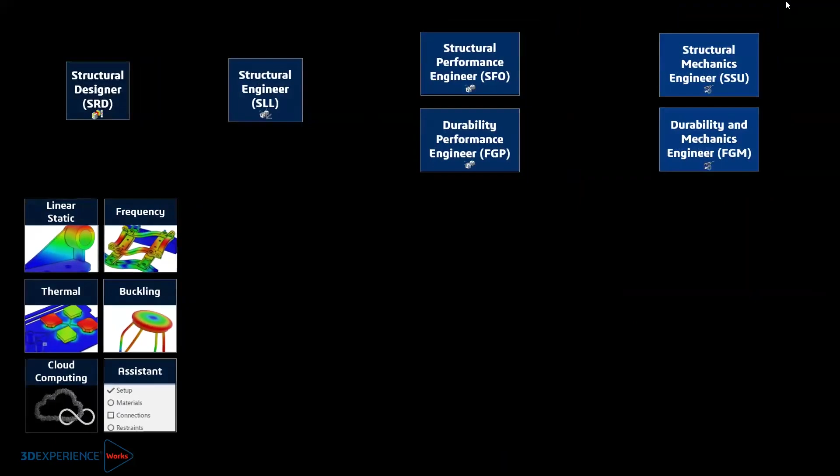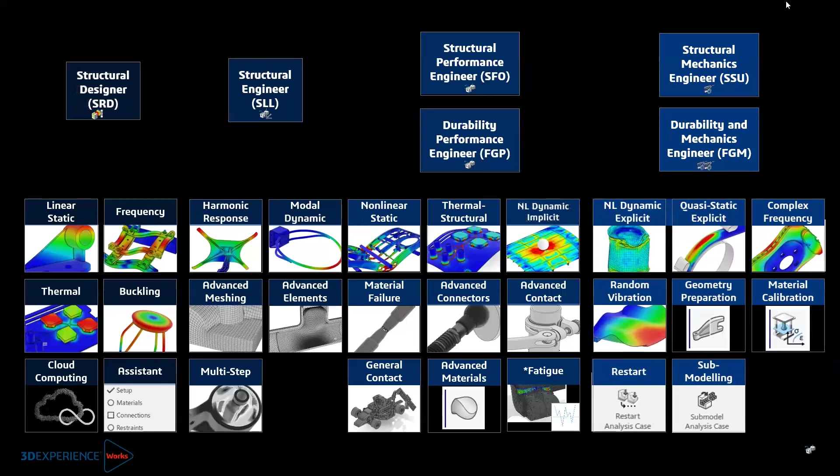So then, as I said, we have all the relevant capability. Just to give a glimpse of what you can expect, you can think of a simple stress strain analysis till explicit dynamics also. We have all the relevant information. These are all a couple of examples of what you can expect when it comes to the simulation portfolio. We have a huge portfolio which can help you analyze your data, whether it's implicit or explicit. We have all the relevant solutions when it comes to simulation, which is powered by Abaqus as well.

Very quickly, I will take another 5 minutes to close my presentation. On the flexible licensing, we do have the traditional licensing scheme where CAD licenses are locked to the system. That is still available for you. We also offer the network license, which we have been providing.

Today, whatever you saw, we were talking about the latest SolidWorks, which is on named users. That means CAD licenses are locked to a person, not to a computer. That means you can literally carry your license wherever you go. For example, you are working in plant 1, and for some reason you wanted to go to the shop floor where there is a computer, you can simply install SolidWorks.

As I said, this is a platform approach, so SolidWorks will be treated as one of the widgets. Simply install SolidWorks in that particular area and you can start being productive. You are working from home, working from office, you go to plant 2, there is a computer, you install it and start working. In this way, you can seamlessly carry your license along with the person. It's a named user license, what we are talking about.

So all these 3 benefits are there with you. You can pick and choose whichever suits you. When it comes to the latest SolidWorks, the 3DEXPERIENCE SolidWorks, I talked about the IT burden area also. Whenever you're planning for IT infrastructure, especially when it comes to the server mechanism, you have to plan for the complete server infrastructure, all those areas.

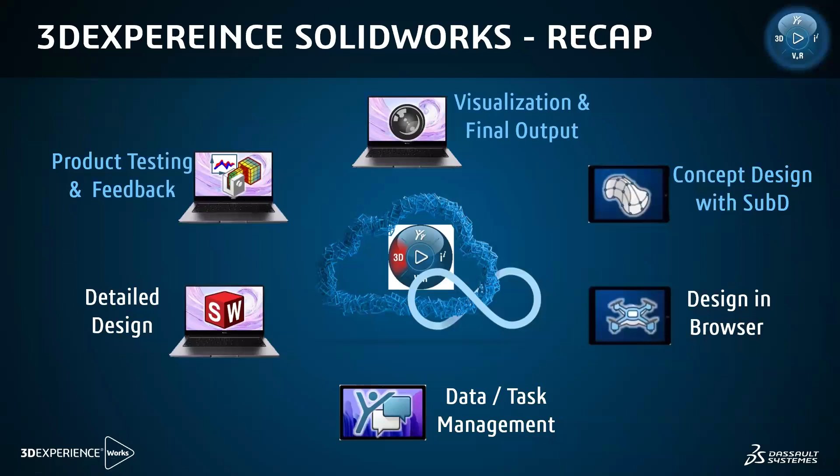So this is my last but one slide. I just wanted to recap. Whenever you procure the latest SolidWorks, you have SolidWorks with you. Data management and task management are inbuilt in nature. Browser-based tools are also there. Visualize is a possibility, you can create photo-rendered images. Then product testing and simulation is also part of it.

I've also tried to showcase how collaboratively you can work, with real-time collaboration. Whether you are a manager, with or without SolidWorks, having a login for the platform, you can take part even in the design activities. As management, I showed that you will be able to release the data and review the data. So without SolidWorks, you can do that. Real-time collaboration is a possibility.

Then we also talked about task management as well. All these things in totality help you to take data-driven decisions. And the best part is you are not dependent on a single computer. Anytime, anywhere, on any device, you will be able to access and control the data, which is your own data. So these are a couple of key takeaways which I thought of highlighting back to you.